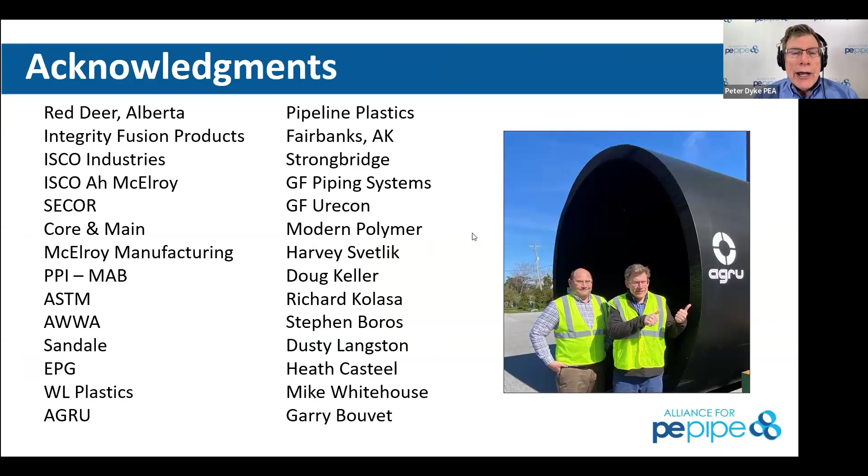Hey Peter, I really appreciate the opportunity to come back on with you guys. Always enjoy the webinars and every chance I get to chat with you guys and share my experience with our story on HDPE and the evolution of why we transitioned a lot of our standards to HDPE. I'm Vice President of Operations for Fairbanks. Fairbanks is about 150 miles south of the Arctic Circle, so we see pretty much winter conditions from November to the end of May. I have 24 years of experience with cold weather utility operations, construction, design, and management. We installed our first HDPE project in 2012, and since then we're up to about 21 miles of water main, 3 miles of sewer force main, and probably 100 miles of services. Again, really appreciate the opportunity to join you.

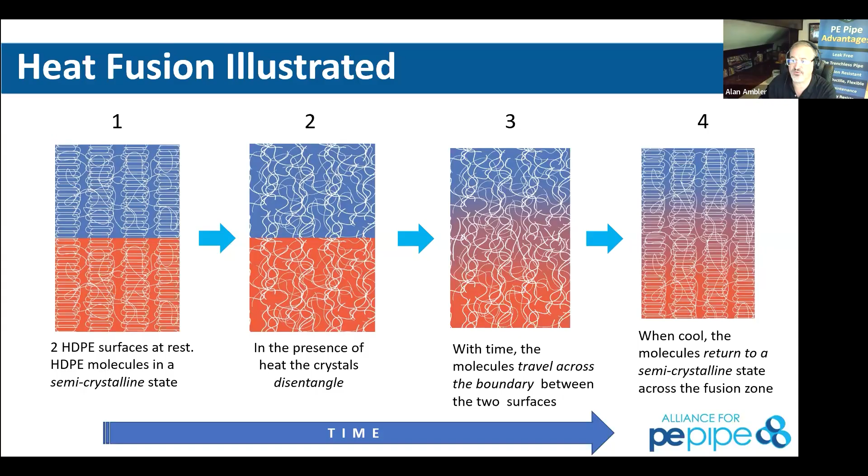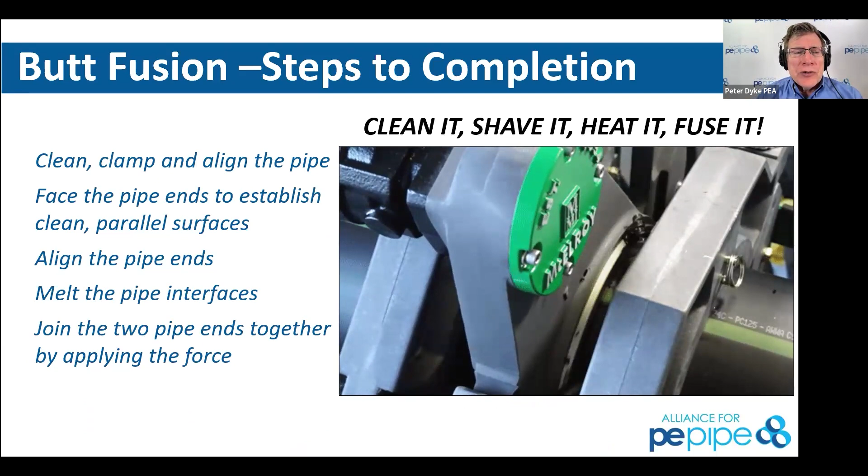Isn't that right, Peter? It is. And what we like to say is clean it, shave it, heat it, fuse it. So this is the shaving process. We use ASTM F2620 primarily as our standard, although some gas companies use different standards. We put it in that McElroy fusion machine. We face or shave, another verb meaning the same thing, and align the pipe ends.

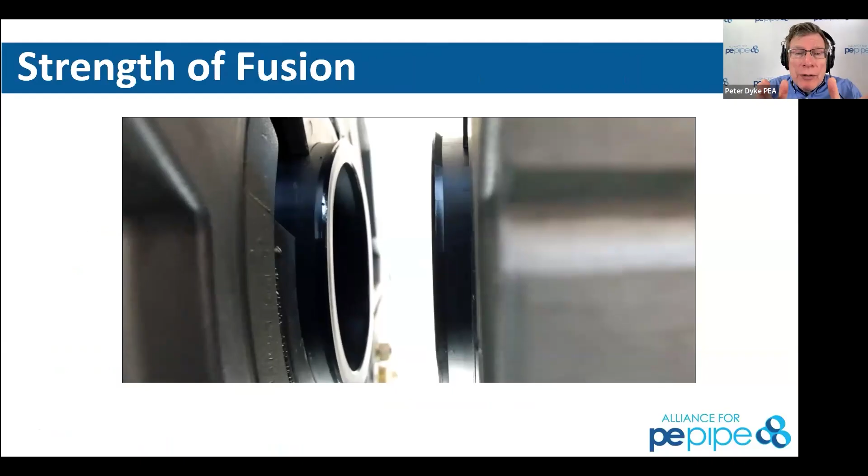After we've shaved it, Alan, then we put it in the heat soak process. We heat up those pipe ends so that those ends can fuse together like you just described. All those little amorphous regions connect with one another, and that joint actually ends up being stronger than the pipe itself.

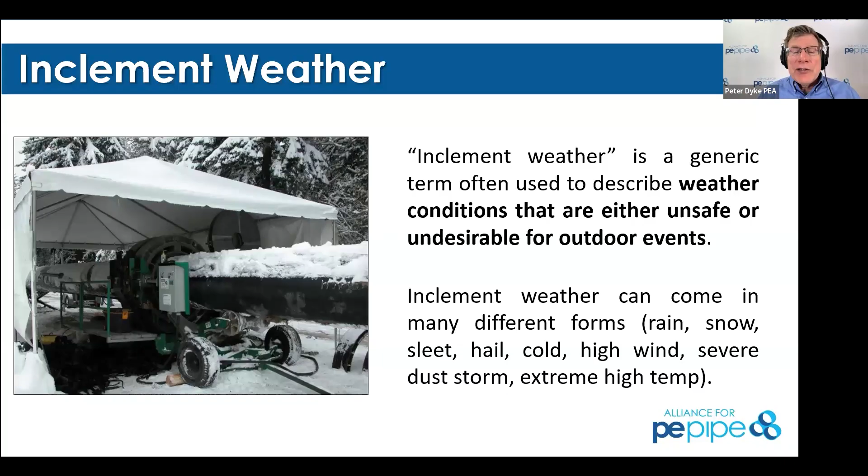Alan and I were in Peru earlier this year. We were doing fusions. It was 95 degrees and very humid. All these things need to be taken into consideration.

Another interesting thing about this pipe is it can be full of water, it can freeze, and guess what? It's not going to crack.

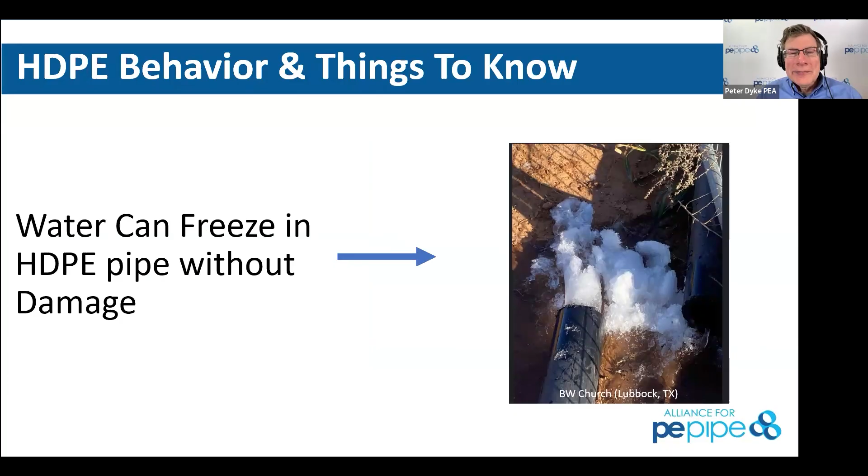And here it is using some of Carl's insulated pipe. Here's water actually coming out of the pipe end that's been insulated without heat trace there. So that's about a 1-inch line and about a 4-inch overwrap.

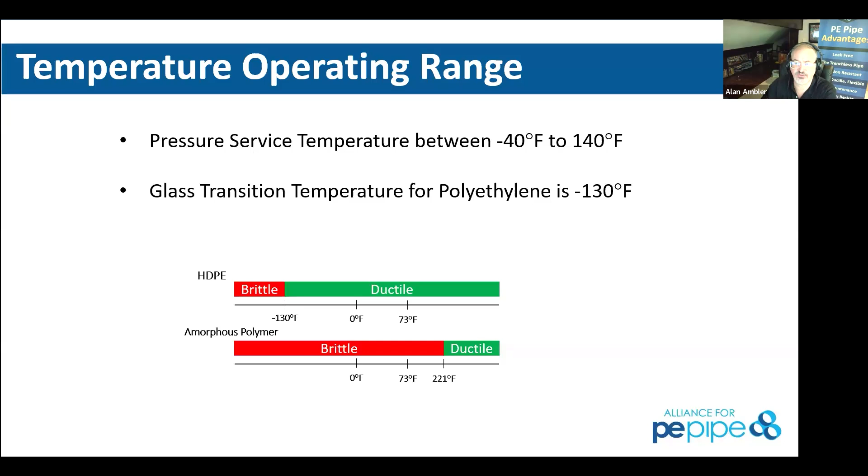So we're looking at the temperature operating range. HDPE happens to be brittle at -130, which is very different than an amorphous polymer, which otherwise could be PVC or products like that, which is brittle at 221 degrees Fahrenheit. So it is very ductile, very rugged and movable, and allows us to work with it within our contractor pull base. Contractors love this material because it is so rugged and durable through this process.

We do need to look at thermal effects and thermal conditions. Basically, HDPE will contract in cold weather or expand in warm weather. We will look at that dynamic change in temperature to give us some idea as to the extent to which that pipe will expand or contract in our area.

One interesting thing to note is that the expansion of the pipe is immaterial of the actual pipe diameter. So if we have a 200-foot pipe that has a 40-degree temperature change, we could see 8 inches of expansion versus carbon steel at 3/5 of an inch.

Now, what that gives us is that the coefficient of thermal expansion is larger for HDPE. That's not the end of the world, because once we translate that through the modulus of elasticity, which is lower for HDPE than it is for carbon steel, the amount of force required to restrain that 8 inches of growth is only 320 pounds versus carbon steel, which could require 4 tons to stop it from moving that 3/5 of an inch.

As we get into bigger pipe, that cross-sectional area gets bigger, and so now the force required to restrain that also gets bigger as well.

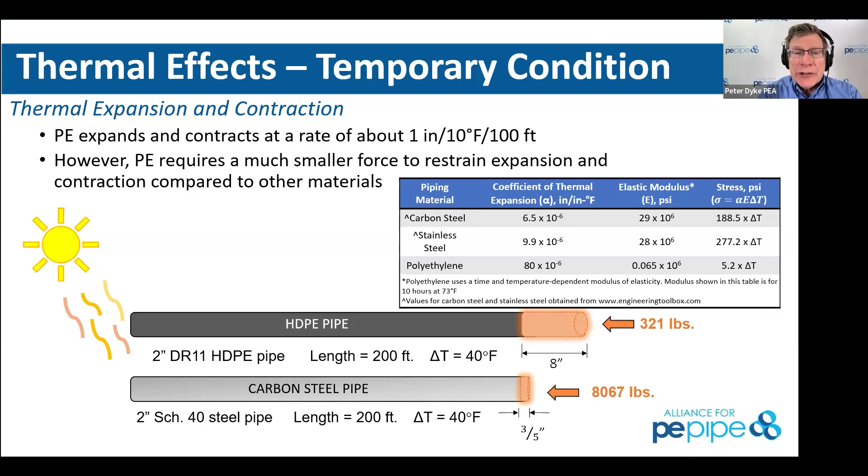I see a lot of people take this issue, which I call a temporary condition, the thermal effects. These issues tend to be during construction. They are important during operation when we're above ground or at grade, but underground these issues are not significant at all. This is one of my favorite slides because it provides the engineer and the owner accountability.

The data logger is an important tool that tracks hydraulic fusion, whether we're talking mechanical in a building and data centers, or a 30-mile pipeline going in ground. This data logger can track what the fusion tech did during the fusion process, and it can be reviewed by an inspector or an owner before that pipeline goes underground.

Also, the side bend tester: you can cut out a coupon from a fusion, so it's a destructive test, and you can sample that coupon to see whether the fusion was done correctly.

Okay, so now you pull that coupon out, and if there was a cut or a tear, it would have been a bad fusion. But in this case, there was no crack, there was no sound. This is a relatively inexpensive way to determine whether or not those fusions have been done correctly. So between the data logger and the side bend tester, you've got it covered. And then just make sure your fusion tech is properly trained.

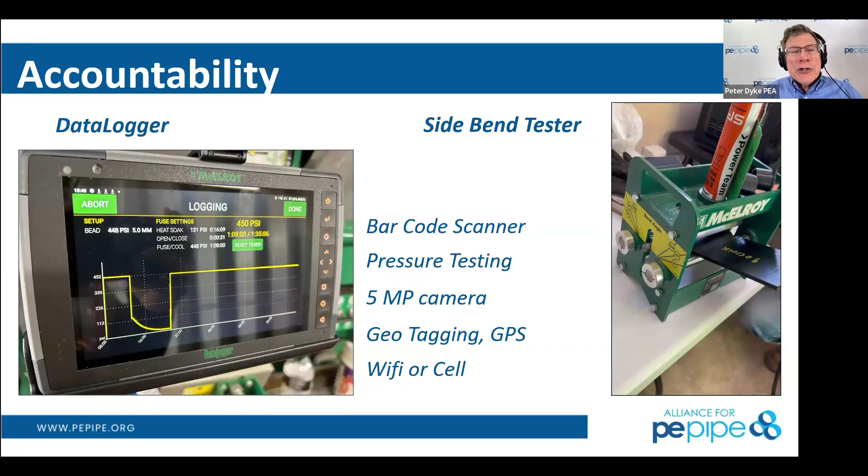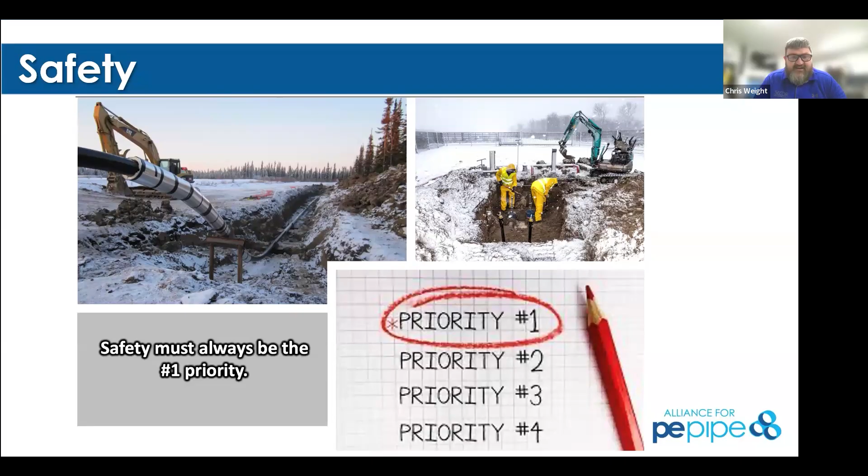All right. So the biggest thing to remember in cold weather operations or warm weather operations is safety. It's the number one priority when you're out there fusing. In the heat, it can get just as bad as it can in the cold. You can always put more clothes on, but you can't strip down out in the field. So remember that, make sure that you're shielding your areas and capping your pipe ends, in the wintertime and in the summertime if the wind's blowing.

You need to maintain your equipment. The chart on here is really helpful for McElroy. You can get this off their website.

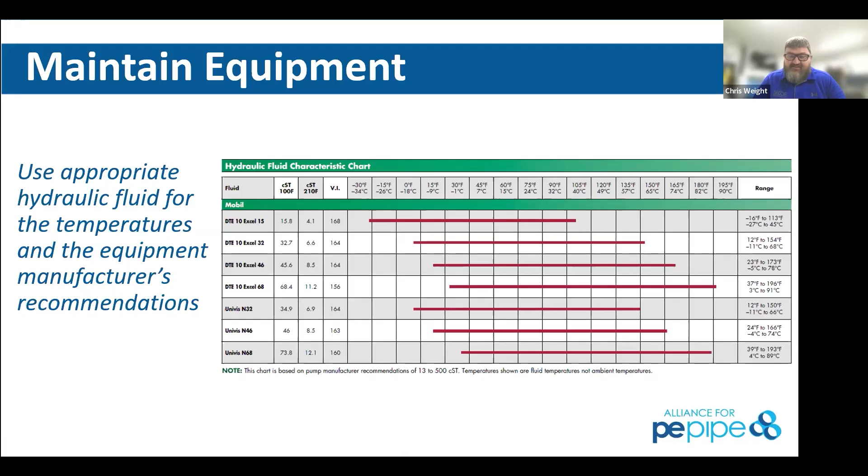It tells you the viscosity of oil and what temperature range you're operating in. Make sure you're running the correct oils in your machine on the hydraulic side, because it will affect fusion pressures and movement of the cylinders, keeping everything running smoothly rather than chattering and moving too slow. If the oil gets too thick, the jaws have a tendency to move really slow until that oil gets up to temperature.

There's a lot of tools out there. On the left-hand side, you'll see a poly porter from McElroy. That's good for 8-inch and down. They can also be used as dollies with a pair of them to move the pipe around on location if you're just doing a couple of sticks where you don't have to have as big of a piece of equipment out there. And on the right side, you're going to see pipe rollers.

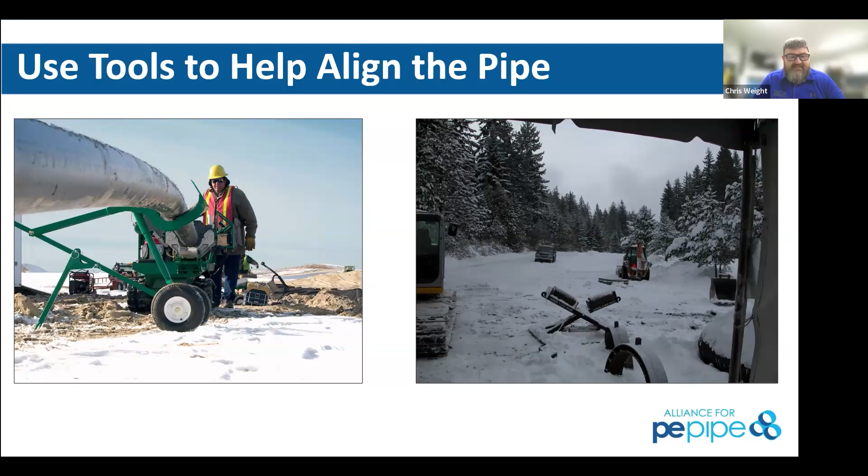There's a lot of different combinations of pipe rollers out there. I recommend using those, especially coming off your fusion machine. You get on the snow and ice, it's not so bad once you got your fusion cooled for the rough handling time.

Then you can start dragging it on the snow and ice and it will not damage that pipe. Check your generators. Elevation is something that we run into up here that a lot of people don't. When you get down in the southern states and get close to sea level, that's where those generators are rated at the highest. Make sure that you got consistent power output. Check the amperage coming out. McElroy does put out on every one of their machines what the voltage requirements are for the heater and the fusion machine if it's an electric fusion machine, and make sure you have plenty of voltage there to run that machine, but also maintain your generators.

Yes, Peter? Chris, we get a lot of questions about welding generators being inconsistent power. For a lot of us out here don't really understand electricity. Can you explain why those welding generators aren't okay to run McElroy fusion equipment?

That's the key to it, is making sure you have the right generator, but look at your elevation, because you need to make sure that as you go up in elevation, you're also going up in wattage, because you lose output out of that generator at higher elevations.

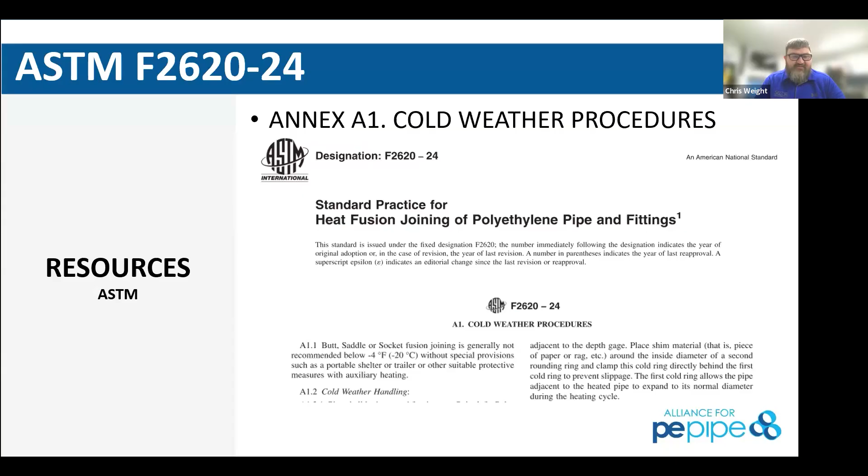You can go into ASTM F2620-24, and Annex A1 does have some cold weather procedures for every type of fusion, whether it's butt fusion, saddle fusion, or socket fusion. I recommend, if you are in cold weather areas, to get a copy of ASTM F2620-24 and read through those cold weather procedures. MAB puts out a lot of good guidelines for fusing in cold weather. This is a free source.

Yeah, we get a lot of our content for today, Chris, from ASTM F2620. The cold weather appendix was first published in 2020, and it was republished in 2024. And then also, as you say, this MAB guideline is fantastic. Thanks for bringing it up.

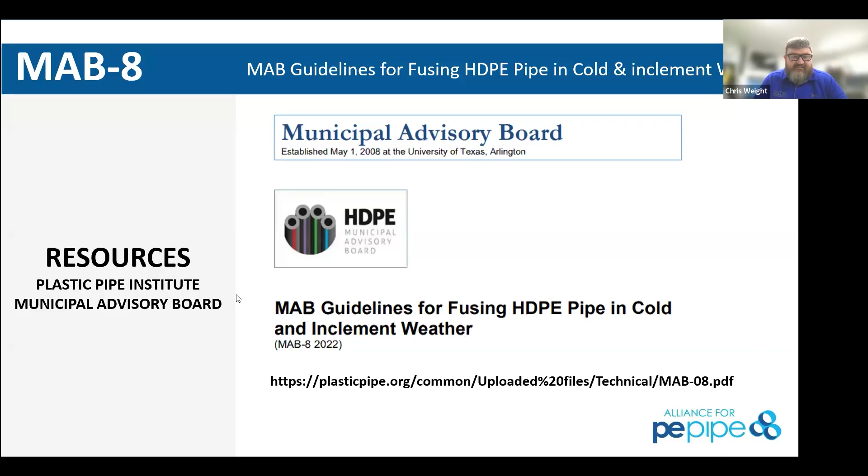No problem. It is a free source, so you can get on the Municipal Advisory Board's website, or the website right at the bottom, plasticpipe.org. Go there, MAB08, and download a copy of that. It will help you tremendously in the field.

Cold weather fusion, according to MAB08, the first thing you're going to do is remove snow, ice, and melted ice from the pipe. In that situation, you don't have to do the entire piece of pipe, just anything that's going to come into contact with the fusion machine, and I would recommend getting a couple feet outside of the fusion machine. This goes for a question I saw pop up earlier about dirt that's built up on the pipe. Same situation here. You need to clean that dirt off. Anything that's going to be close to the fusion zone, you need to clean off.

That way it's not plugging up the serrations and the inserts of your fusion machine. You get gripping force, pipe's not going to slip. Make sure that all that's clean inside and out. There's nothing worse than getting ready to put the heater in. You bring it together and water comes running down the pipe because there was a little bit of ice in there, and the heat started to warm it up just enough where now you've got water running down the pipe. So you have to stop and clean that out.

HDPE does have reduced impact resistance in cold weather. Don't drop your pipe. You need to handle the pipe just like anything else, with care. I've seen people just take a loader and shove a load of pipe off the truck, and that's really not a good situation.

So provide adequate enclosures for your pipe and your fusion tech. That's going to be one of the keys in the weather. I was just on a job the other day, the guys were out there and it was like 5 degrees and the wind was blowing 30 miles an hour, and they didn't even have a tent set up over the fusion machine. I said, guys, you got to stop, you got to get a tent over this and block the wind.

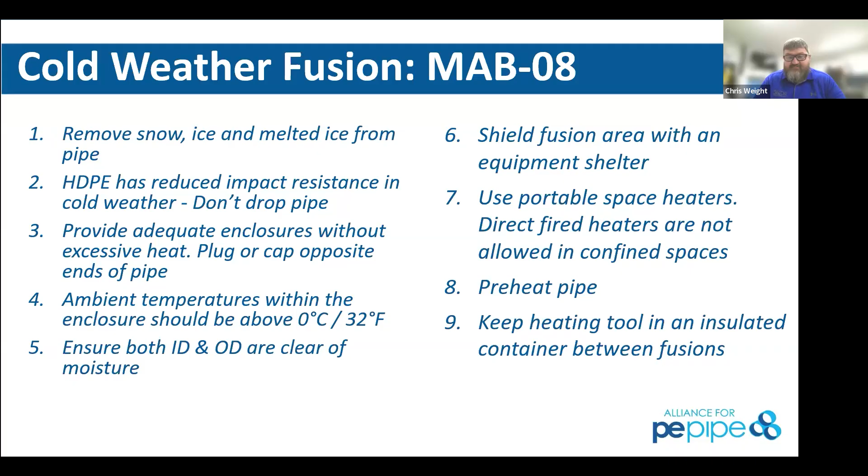And they were getting inconsistent fuses, and that will cause that. When the enclosure should be anywhere around 32 degrees, you should start enclosing it. And then space heaters will help. Preheat your pipe will help, and keep the heating tool in an insulated container between the fusions.

Patience is the key. This is the number one golden rule. Your cool down times are going to be your cool down times. Your heat up times in the winter time are going to be longer. If you're meeting a bead in the recommended time frame of ASTM F2620, which is 4.5 minutes per inch of wall thickness, you're probably heating under some sort of pressure. You have to be patient. Make sure you have no pressure and the beads are developing naturally up against the heater instead of with pressure.

Golden rule number 2 is change the conditions, not the procedure. ASTM F2620 and MAB08 were written for a reason. Make sure that you're following that, even with their cold weather procedures. You need to change what you're doing based on the conditions rather than changing the procedure. The procedure is set in stone on how you fuse pipe.

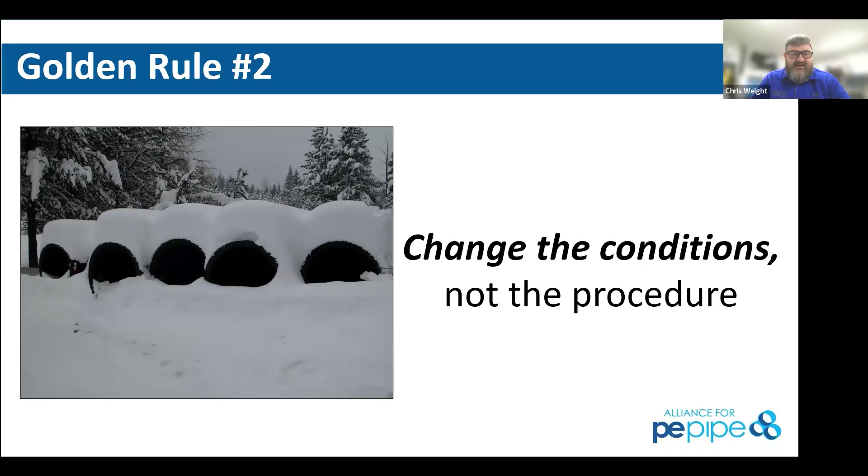Again, back to removing the snow and ice, the picture you can see there, anything that's going to come into contact with that fusion machine, and then about 2 foot outside of that, that snow and ice is going to need to be cleaned off, scraped off with a plastic ice scraper. I don't recommend doing anything metallic on that pipe because you can scar it up that way. But remove the snow and ice inside and outside as far as you can reach on the inside without putting yourself in harm's way and crawling inside a piece of pipe. Obviously, the bigger pipe, you can do that. The smaller pipe, you cannot. But make sure you're blocking anything from running down, especially if you're fusing on a hillside.

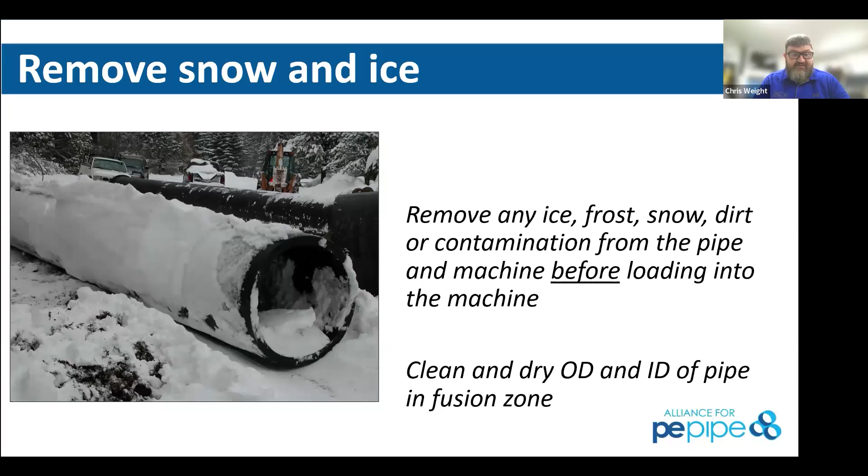Examine your pipe. The car there, they had a bad day. I see a lot of people hit pipe, and when you get out in the field, that gouge in the middle, if it's not over 10%, go ahead, Peter.

Yeah, Richard Kolasa has got a great story about a car hitting a pipe too, and it was minus 30 degrees, and the damage, Chris, was at the bottom of the pipe. In this case, the damage was obvious, you know, we've got a tire in a car.

Image number 2 is kind of interesting, Chris. You look at that and say, 'Oh, the pipe's damaged,' but is it really? No, and that's it. You can use a tire depth gauge. If it's not over 10% of the wall thickness, it's not considered derated, it's not considered damaged. You can drag it on the asphalt as long as you're not putting gouges in it that are over 10% of the wall thickness of the pipe.

Yeah, that's kind of interesting. Richard Kolasa, you're up. Just a quick comment on that: if you do see those impacts, the one thing we did not notice on that cold weather impact of the car, it did crack, but of course cracks in polyethylene don't propagate really long, they actually stop. So the crack was only about 1.5 feet long, but we ended up pulling that thing in through the drill because we did not see that crack, because it kind of folds in on itself tight. Just make sure you inspect your pipe before you pull it underground, because it did leak.

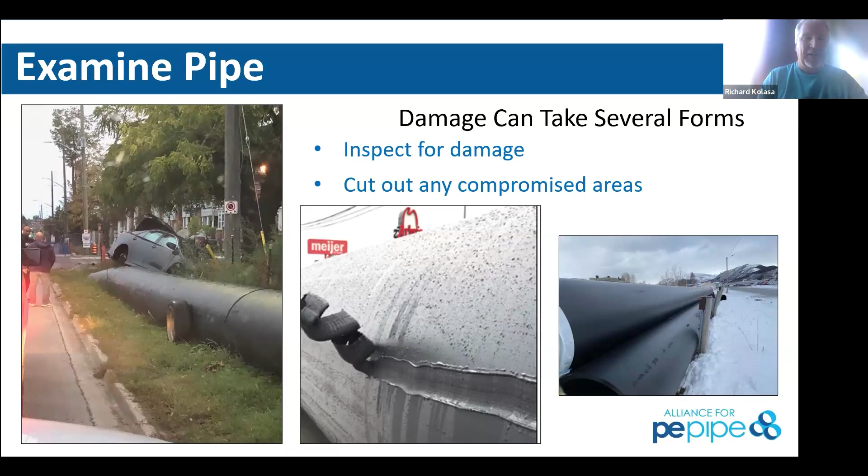But it was a bit of a bugger because we had two weeks to replace that line. So Dan Landy and I were out on this job site in Arizona, and it was, gosh, Dan, I don't know, 15 degrees. There was some JM Eagle pipe that had been damaged. We're like, wow, what happened there? Well, they dropped it off of a front end loader. It was 36-inch DR17 and it cracked. So that does happen on occasion, doesn't it, Alan?

It certainly can. We had some questions about Arizona in particular for hot weather as well. Some of the things you'd look for in hot weather is to understand the expansion through heating up of that surface, especially in temporary construction conditions when we're elongating the pipe and then putting it down into the ground and allowing it to calibrate with the soil temperature. So, of course, I'm derailing and talking about warm weather, but there are some places in Arizona with the cold weather we're talking about as well.

We don't typically do a warm weather webinar, but there is some nuance through pressure testing in the morning as opposed to the afternoon, because there's some expansion diametrically of that surface once we start to absorb the heat, which the carbon black does on the outside of the surface of the pipe.

So keep going, Chris. You're doing great. Thank you. Don't drop your pipe. We've talked about this. As Peter just said, they dropped that stuff in Arizona and it broke.

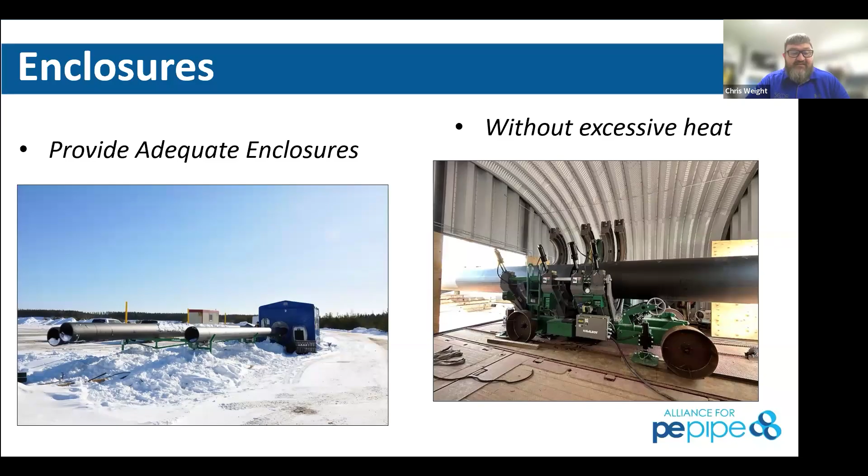It can happen. Provide adequate enclosures. You don't want excessive heat in there. You want to get that pipe up. I try to get all my pipe up when I'm preheating in enclosures to around 50 degrees at a minimum. That can go either direction there. You don't have to be exactly at 50 degrees, but that's where I feel most comfortable making my fusions and preheating that pipe end.

Protect your fusion area. You can see the tent down there. They've got the end of the machine sticking out so it can still pull fresh air in. You want to be sure everything is going that way. You don't want to fill your enclosure with exhaust or anything like that. So be careful when you're just throwing a tent over a fusion machine, because these diesel powered machines will smoke you out eventually.

On the right, you see the McElroy Quick Camp. I have not had the pleasure of working with one of these yet. I don't plan on going to Canada anytime soon to really work with one, but it's a great machine. It's a Connex, folds out. It's got a fusion machine in there. You drag the pipe on through, make your fusions. Plug the ends of the pipe.

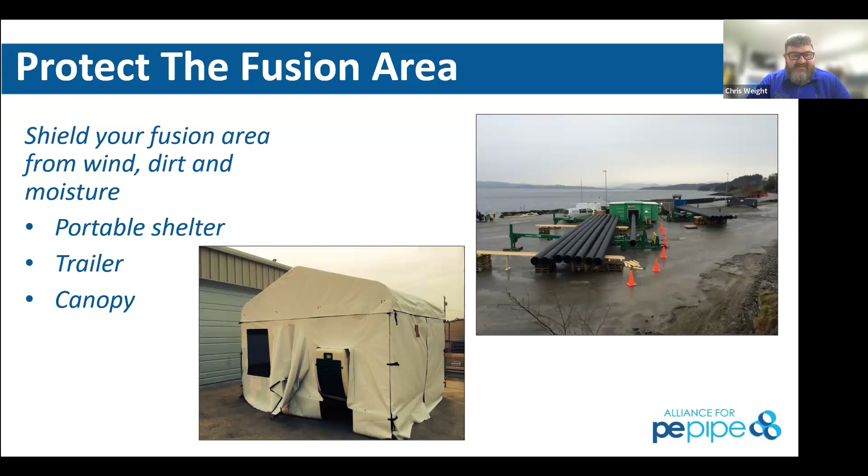Make sure your equipment's free of ice and snow. That goes to scraping the ice and snow off of there. Go ahead, Peter. Hey, yeah, go back one slide, would you, Alan?

I actually was pressure testing on a line that was not in the municipal water industry, and as I was blowing the pressure test down, I blew an animal out of the valve. It was quite stinky when that happened, because it had obviously been in there for a while. So capping the pipe ends and bagging them off keeps the animals out, because that pipe, even in cold weather, is still going to be warmer than being out in the snow and ice.

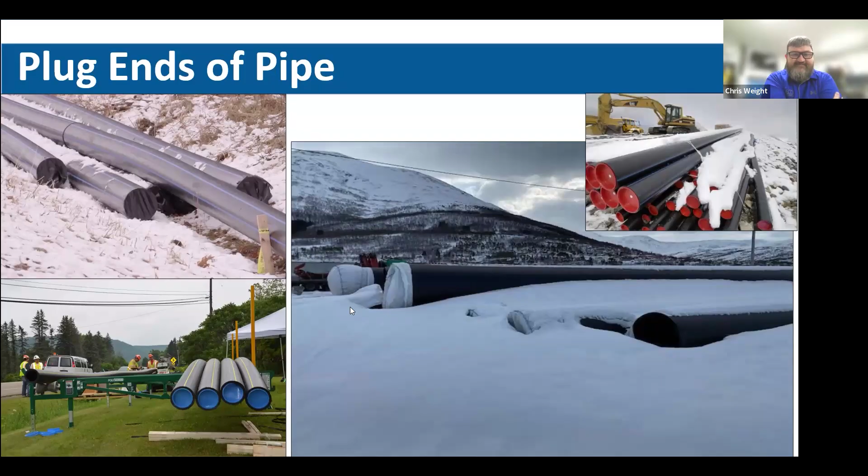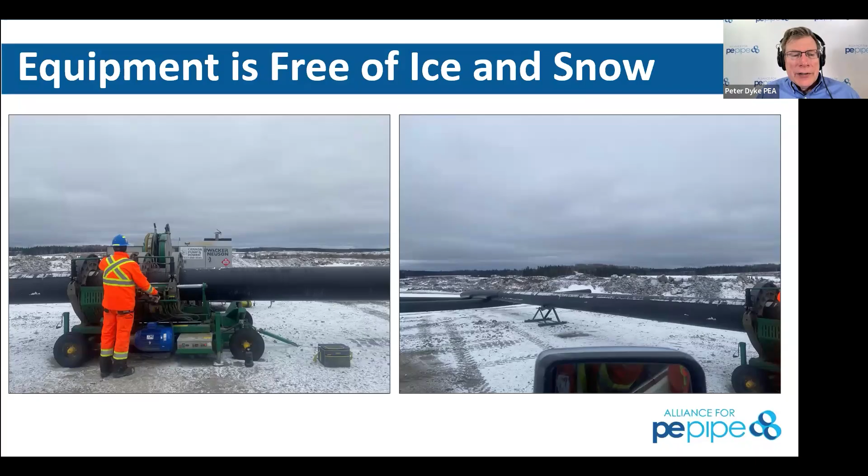I like this slide a lot too, because on the left we have the guy doing fusion and there's no snow on the pipe at all. And there's a pipe stand over there that's fairly clean of snow and ice. So these are people taking the time and care to do it correctly. And then the one on the right, Chris, I wanted to mention this one.

This guy gets an F. I mean, the guy's got a tent, but he's got snow right up to the jaw. And as Chris, you've described to me before, with that heater going, that snow could melt and you could end up with water in the fusion zone.

It's not a matter of if that snow can melt, it's when that snow is going to melt. That heater's running 400 to 450 degrees. It doesn't take long for that heat to permeate out through the pipe. Hell, just the sun shining on it will melt the snow and ice a lot of times, especially if you get in a tent like that. So the F is really big there, it might even be an F minus. They should have cleaned that all the way outside of the fusion machine.

It looks to me like that's a 1600, so they're fusing probably 54-inch pipe there, and there's a lot of snow and ice, so there's a lot of water there. If you were to melt that down, there's easily 3 or 4 gallons of water there probably.

So Chris called it a 1600. McElroy, with a lot of their larger machines particularly, their primary name is in metric, not imperial, so 1600 millimeters is a 1.6 meter. So it's 1.6 times 39 to get the diameter in inches. You just kind of have to get conversant with that, particularly with the larger machines.

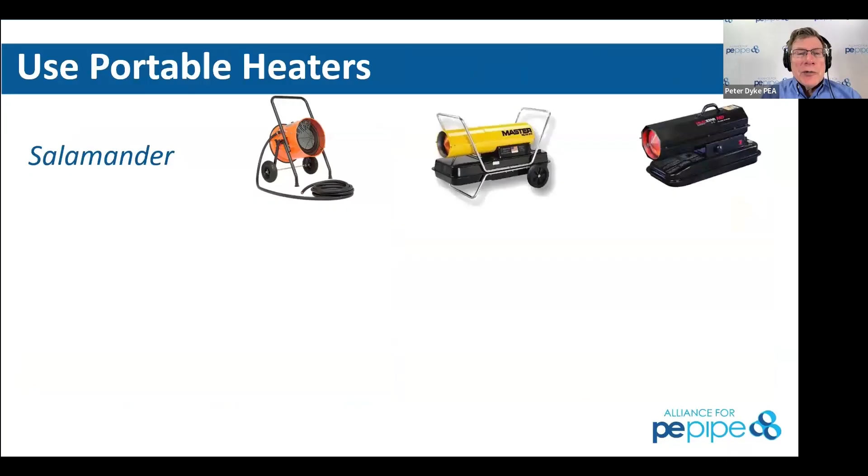Okay, Chris, tell us about some heaters. Portable heaters, you can use anything that's not going to put direct flame to the pipe. Salamander heaters at the top, we've used those. Obviously you don't want to get them so close to the pipe that they start melting the plastic itself. Infrared heaters work great. We use a lot of heating blankets, especially on the electrofusion side of things, to preheat the pipe before we put our electrofusion coupler on. Any of those are good options. Anything besides an open flame touching the pipe is a great option.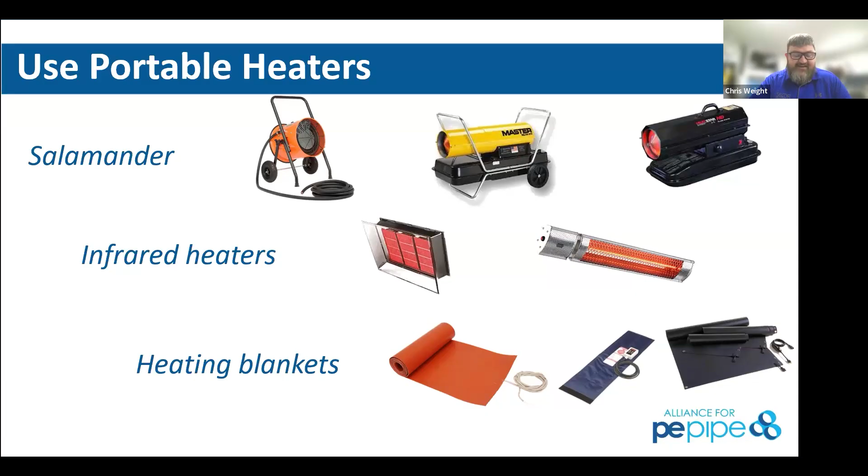I saw a question pop up earlier about somebody wanting to know if they could use a torch to melt the ice and snow out of the inside of the pipe. I don't recommend anything with an open flame getting that close to the plastic.

Preheat your pipe ends. This is very imperative that you do that when you're pulling your pipe in and that pipe's sitting out there. In the new data logger app, it actually asks you for a pipe temperature, which is kind of nice, so it makes it real easy to pull that pipe up within about a half to a quarter of an inch of your heater. You don't want to get it over 120 degrees, but just let it sit there with that heater in between, and it will preheat those pipe ends up.

Just to reinforce what you said, Chris, ASTM F2620-24 in the appendix tells us that preheating is preheating, but it's not preheat soaking. So you're not actually touching the pipe end. You're within a quarter to a half inch at most. Is that correct? Yes, sir. Okay, so just want to make that very clear.

Use tents, tarps, and warm air. As you can see right there, they've got a flameless heater ducting it down through the pipe. If you don't set your heater properly, you can get that pipe quite hot, so you got to pay attention to what you're doing with it. But that's a great setup to be able to preheat two sticks of pipe at a time. They've got it mounted on the back of the truck.

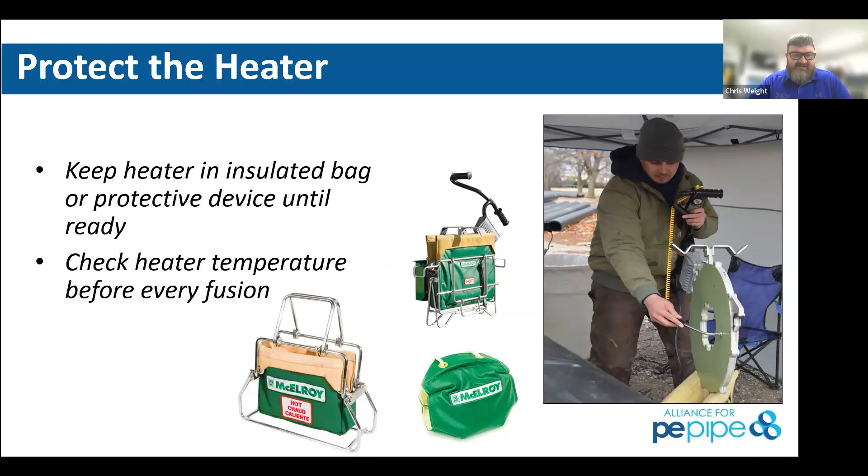They just move it down when they're getting ready to make the next fuse and start preheating the next two sticks. So that's a great situation. Protect your heater, make sure it's always in an insulated heater bag. There's a lot of different options out there that McElroy has. Every heater comes with a heater bag, so make sure your insulated bag part is not shredded, because as they start shredding, putting the heater in and out, they will start deteriorating, and you'll lose heat out of them that way.

So just in a quick summary here: don't drop your pipe, provide your adequate enclosures, use your tents, tarps, and warm air if possible, protect the fusion zone - that's one of the biggest ones right there, making sure there's no snow and ice in there. Portable space heaters are really handy for your operator, preheating, and keep the heating tool in the insulated container.

You got to keep that container clean too, don't you? Yes, sir. They've done a really good job now with putting webbing on the bottom, so the dirt actually falls out instead of having a sealed bottom on them, which is kind of nice. Oh, I didn't know that.

That's news. We just had a question come in, and I think it's a good time to reinforce it. It's important that these guys are trained, the fusion techs. You're an inspector - how do you know that the guy's been trained and he's not just feeding you a line on why he's going a lot faster today than he was yesterday? Well, that's the biggest situation. You got to be sure you're getting trained by an adequate trainer.

There's various distributors out there. McElroy University is great at their fusion training. They need to have a viable fusion certification from a viable instructor. With McElroy, I'm a McElroy certified instructor also, so I carry a card with me that I can just tap on their phone, and it pulls up a website from McElroy and shows that inspector my credentials that I'm a trainer. So make sure that your guys are getting trained by a viable trainer and not just a tailgate training.

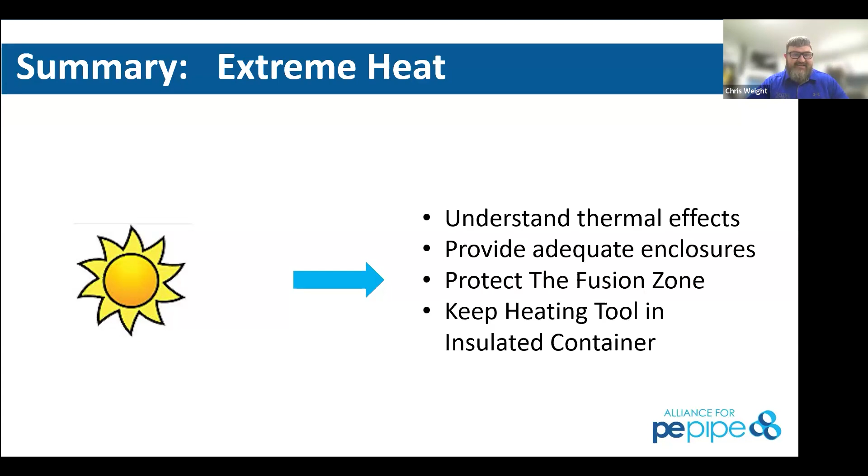Again, protecting the fusion zone, putting your enclosure up - it could just be one of the little 10 by 10 tents from Walmart over it, but it's keeping the sun off the pipe and helping lower those surface temperatures. But one thing you really got to pay attention to is just because you took a pipe temperature at the top and it's 110 degrees, the bottom is going to be cooler than that. So you could see some inconsistent heating. I've seen contractors actually roll the pipe over and let it sit for a little bit until the temperature equalizes. Obviously, bigger sticks is hard to do that.

Windy, same situation - protect. That's what we got to do. We got to protect the ends, we got to protect from the wind.

I don't care if it's hot wind or cold wind, we've got to protect the ends to keep the snow and dirt from blowing up into the pipe, onto the heater, and into the fusion zone.

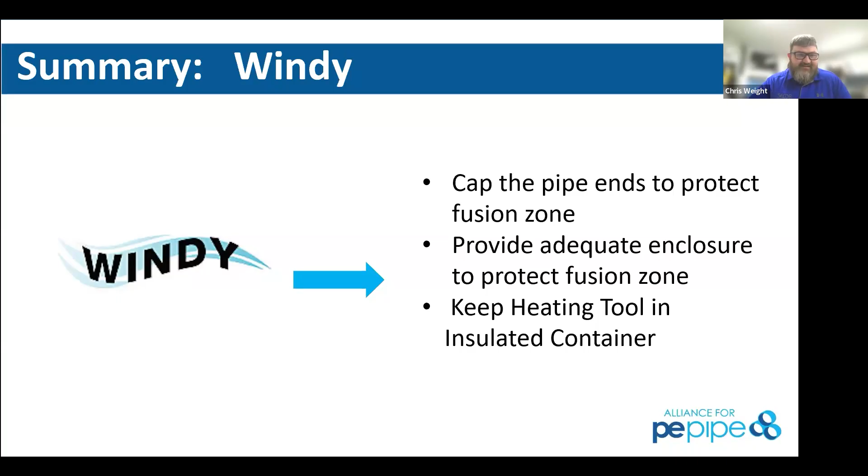I actually have. A good day with no wind in Wyoming is about 30 miles an hour, it seems like. So protecting it is key. You see a lot of guys out there throw a bag over the end—you don't even have to tape it on. If you use a burlap sack style or synthetic ones, just put it over the end of the pipe to keep the dirt, snow, and ice from blowing up into it.

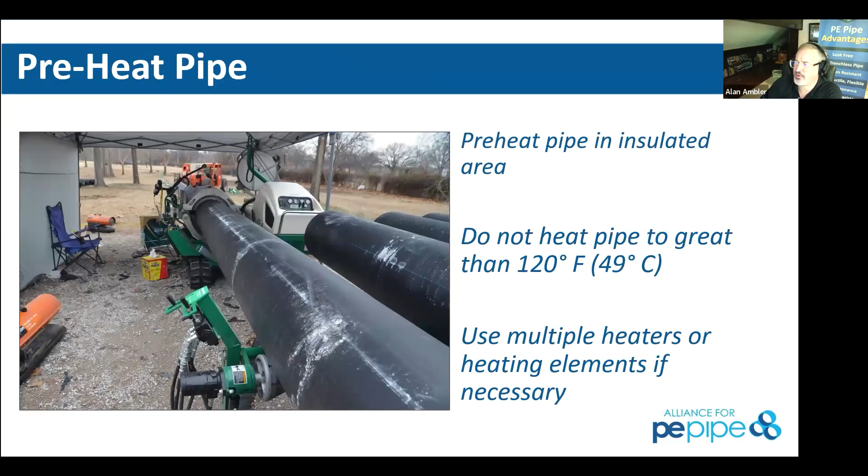Alan, Peter, and Chris, we got a really good question about all these things going on to protect the fusion zone and teach people how to fuse—that it seems to be leading to more cost than installing other products. Sometimes we get to really harp on key things, and sometimes we don't, so I'm going to go right back to this slide. Thank you very much for that question.

The productivity we get by fusing multiple long runs at one time translates directly to major cost savings. When a contractor understands that we can fuse out 500 feet, 1,000 feet, and then dig a ditch that long and dump the pipe right into it, they're going to find massive cost savings.

If we're just going to sit there and move the machine from one joint to the next, you're not going to do this efficiently. It's called a paradigm shift with our contractors—understanding that long linear length and our availability to put a single piece of pipe, maybe 1,000 feet, into the ground is going to give us a huge amount of productivity.

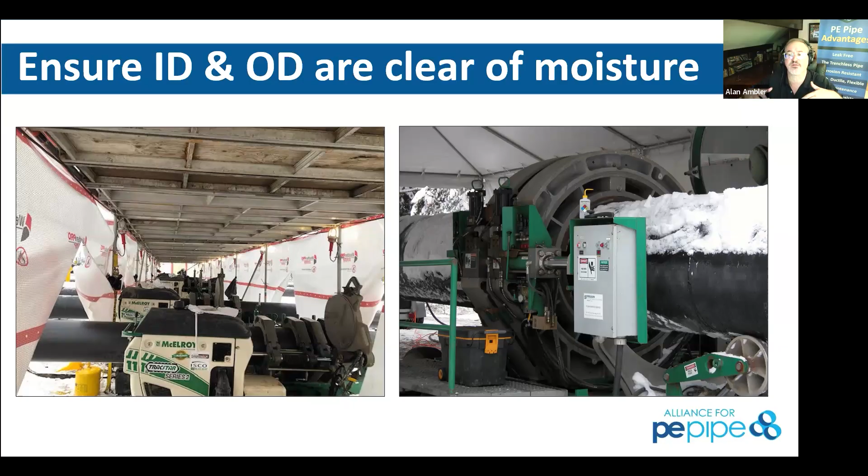That's part of the learning—training that the joints are stronger than the actual pipe itself and fully restrained. Then we move to this huge amount of productivity to greatly further minimize cost as we go through it. So thank you very much for affording us the luxury of answering that question.

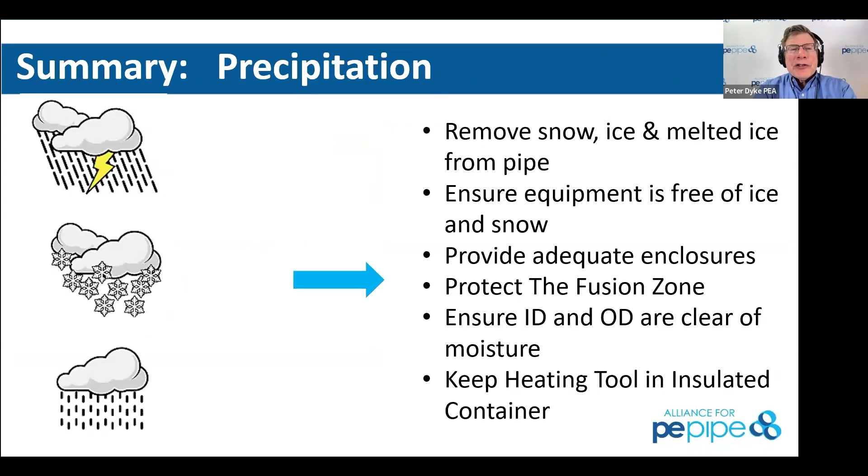Peter, I don't know if you want to comment more here, but we're ready to move on. Yeah Alan, one reason we talk about polyethylene the way we do is, particularly post-COVID—pre-COVID, the off-the-shelf cost of polyethylene was more expensive than PVC. For whatever reason, PVC has been more expensive ever since COVID.

But in the 15 years I've been doing this, Alan, we've seen that polyethylene is consistently the lowest installed cost, whether pre-COVID or not, particularly with horizontal directional drilling or pipe bursting. In many cases, our open cut costs up to 48 inches are less expensive. Above 48 inches we tend to be just as expensive as every other material because we're all open cut at that point.

So Tariq, why don't you come on—your first question: is polyethylene more or less expensive than legacy materials? Less expensive. Why?

Well, for one, cost—my presentation is going to cover a lot of it—but shipping, like for Alaska and Fairbanks here, is extremely expensive. On one project we had 36,000 feet of pipe going in the ground, and it showed up in our staging laydown area on 2 trucks. Any other material would come in rail cars, super expensive. It's efficient, it's affordable, and it affords you the ability to directional drill.

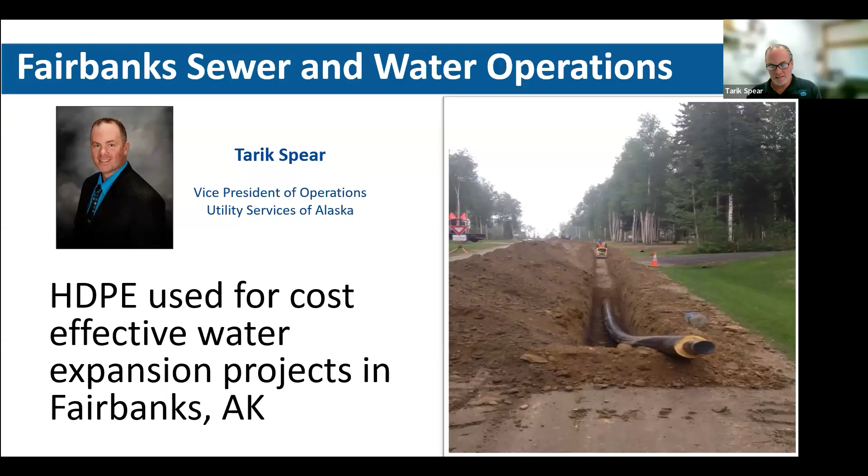Fairbanks, Alaska. Everybody's experiencing a lot of cold across the Midwest, pretty much from Texas to the Carolinas, but we experience that every winter. This winter has been exceptionally cold for us. I think we hit a record - we were below zero for 32 days, the longest duration of that temperature in 108 years. Fairbanks is beautiful in the summer, but can be extremely harsh in the winter.

Finding materials that are affordable, efficient, reduce O&M costs, and improve the thermal heat retention of water that we're already paying hundreds of thousands of dollars to heat to keep our outer loops warm reduces energy costs, improves C factor, and makes it cheaper and less costly for our ratepayers. Our electrical costs here in Fairbanks might approach 30 cents per kilowatt.

Fairbanks Sewer and Water: we have a 5 MGD water treatment plant, 8 MGD wastewater treatment plant, collections and distribution with about 250 miles of distribution main. We have about 21 miles of HDPE, and our standard for any expansion project is now HDPE. Roughly 10,000 metered customers, and the temperatures do get cold.

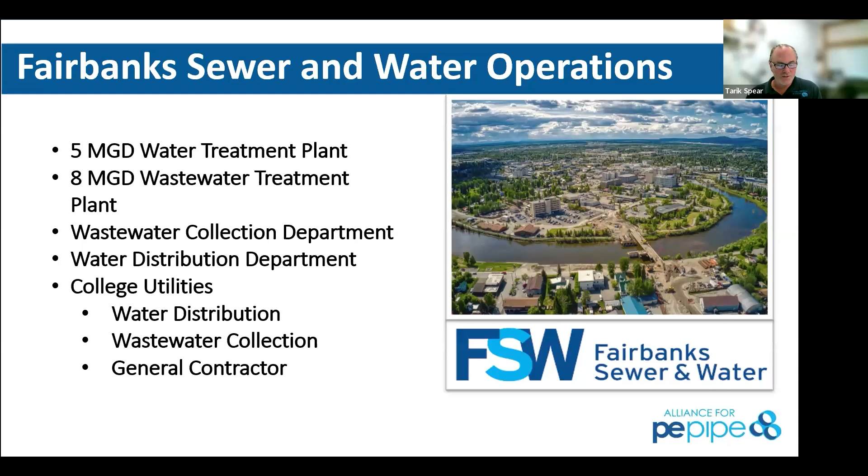This is our headquarters, Utility Services of Alaska, with Golden Heart College Utilities, and the sign reading 41 below, and off to the right you see minus 50 below.

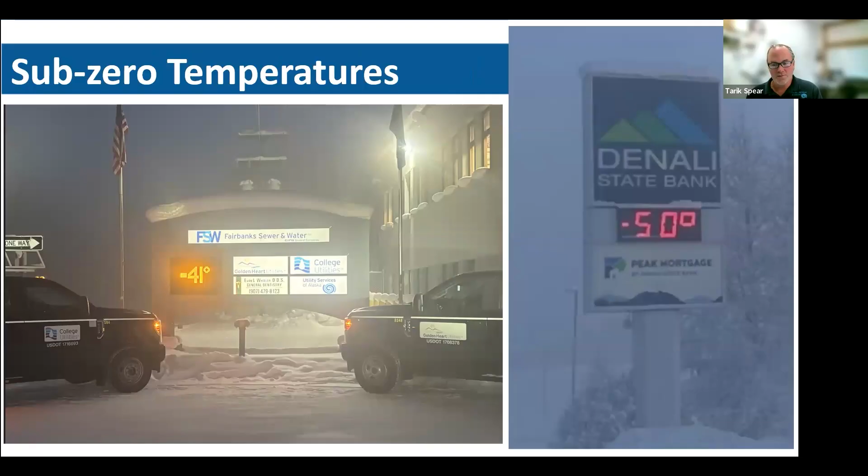We track freezing days every winter, and we can track the ground freeze depth in the fields and in the roads. This is an example of road depth - it's kind of shaded, but this was January 15th. Today's road depth was 8 feet, and you can see where the average is. By end of April, our pipes and a lot of our infrastructure are sitting in 12 feet of frozen ground.

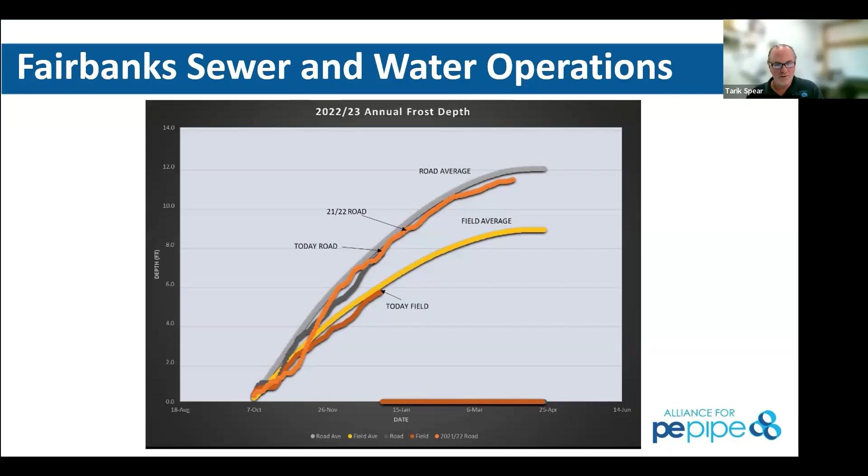In addition to the seasonal freeze, we have a lot of permafrost. Fairbanks is Arctic, 150 miles south of the Arctic Circle, with very corrosive soils - a big plus for HDPE. Permafrost raises havoc on all of our infrastructure through these areas. As soon as you strip the surface and excavate down 4.5 to 5 feet and put a pipeline in, I don't care what you backfill with, that frozen ice is going to start melting. This picture is an example of that.

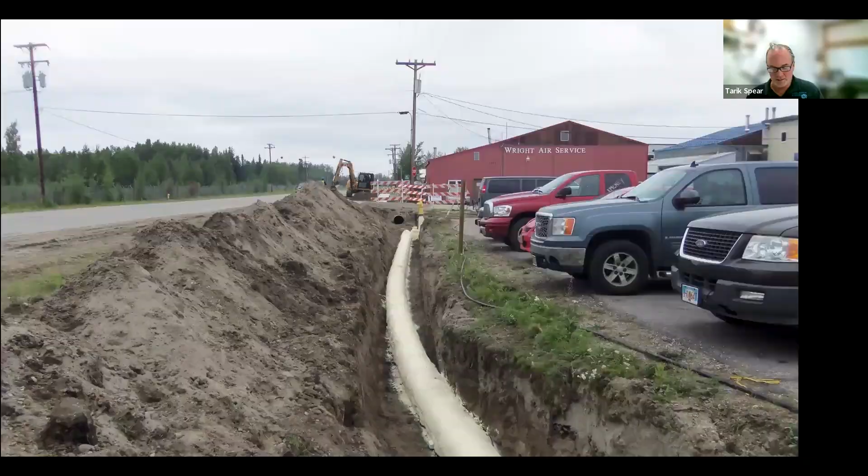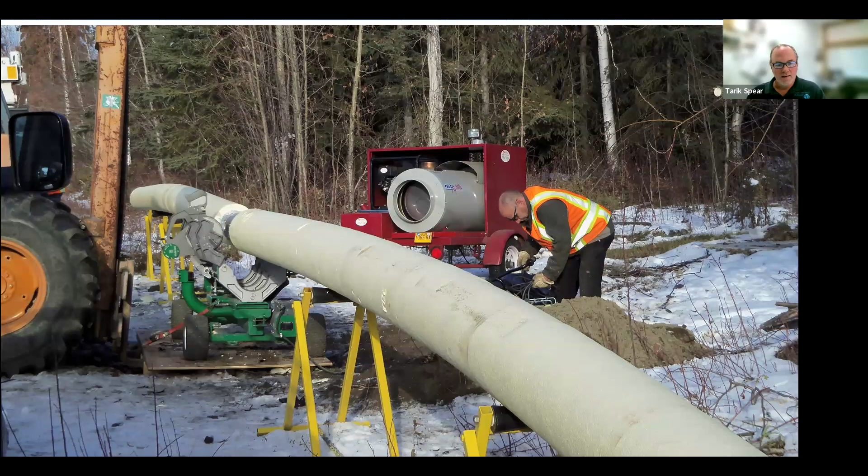Some of the techniques we use for insulating - these next slides will show you what we have. This was an 8,500 foot long slip lining project with 14-inch HDPE SDR11 out by the airport. We had just come out of one of our slip line sleeves and aligned our pipe, installed an isolation valve and a fire hydrant, then ducked back in. There's a local polyurethane contractor here who will come and spray that pipe for us right in the ditch - this is an 8-inch HDPE SDR17. That same contractor built a 40-foot lathe and takes the 40-foot lengths of HDPE and spins it on that lathe as they spray it, putting a nice 2-inch uniform polyurethane spray over the HDPE before it's installed.

I just want to give Chris a shout out - that was an amazing presentation, Chris.

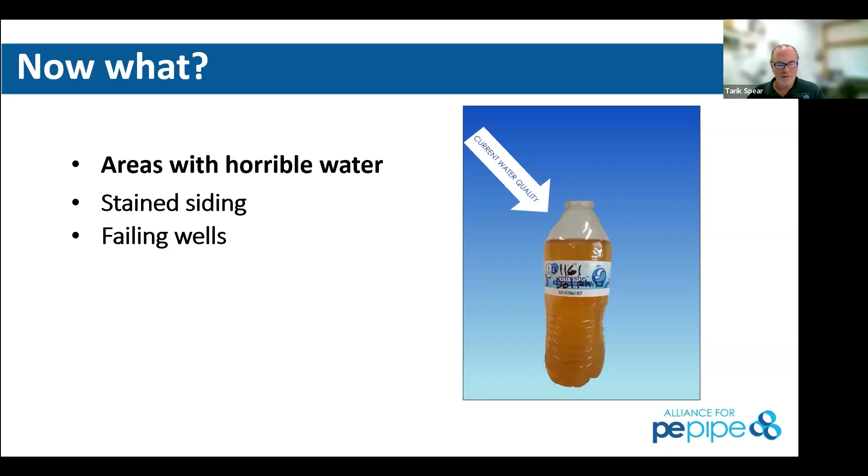Lot of iron, manganese, arsenic, nitrates in areas. So for us, getting potable water to our area is kind of a priority for our utility. I mean, this is what comes out of someone's well.

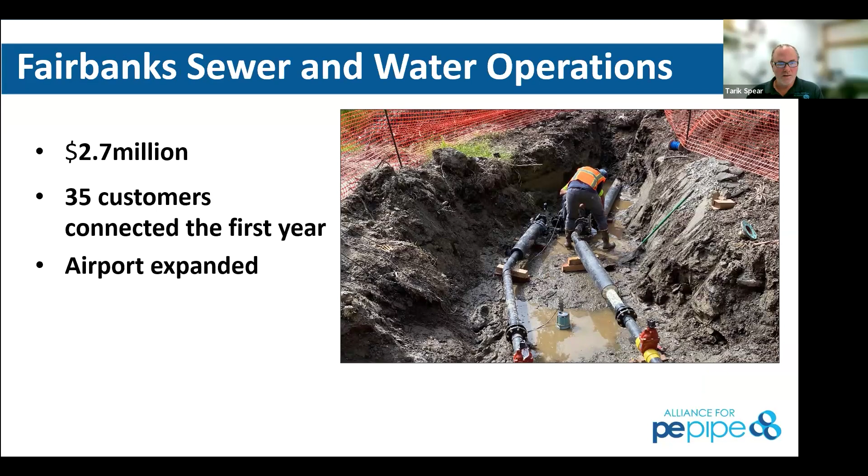This one just kind of ties in, goes into one of our projects and the benefits, cost savings. This project served 35 customers its first year. I think we have well over 100 connected since it was installed in 2013.

As our projects and experience with HDPE evolved, we became better at thermal modeling our heat loss. It's kind of like a battle of BTUs. You have 40-degree water inside your pipeline, and you have frozen ground at 28-degree temperatures on the outside of it.

We discovered that if we're building a system that's 40,000 feet, and that molecule of water takes 9 hours to get from point A to point B where it returns back to a transmission main, we can save hundreds of thousands of dollars on additional insulating by getting spools. We saved, I think, $600,000 in insulating costs and an additional $400,000 just in pipe fusing by going with spools on this project.

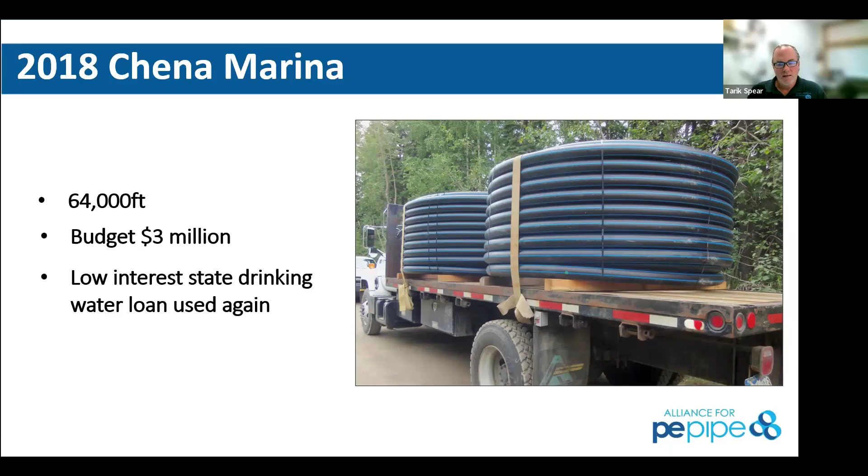This was a repurposed U-liner trailer. We used to do pipelining, but we were able to mount the 4 and 6 inch spools onto this pipe trailer and then pull it through a McElroy pipe tamer.

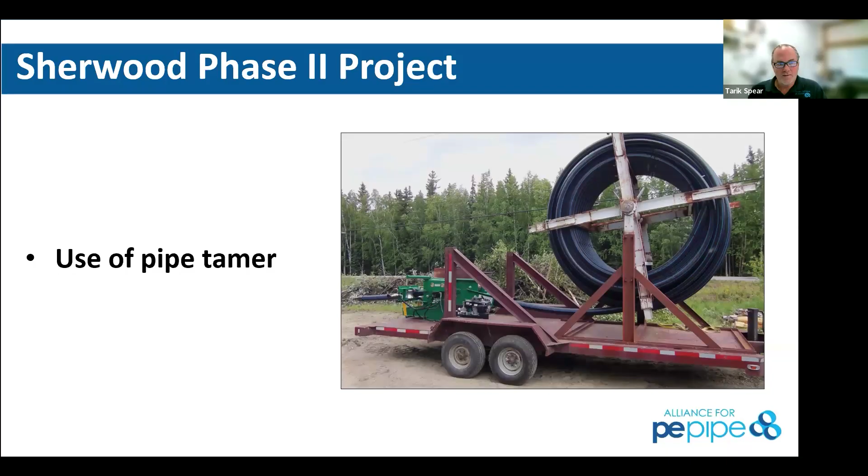This totally changed things. I mean, you want to talk about cost savings — we were averaging 1,000 feet per day on this project, total project length. I think we directional drilled over 7,000 feet, had 2 river crossings, and averaged 1,000 feet per day. It was a really successful project.

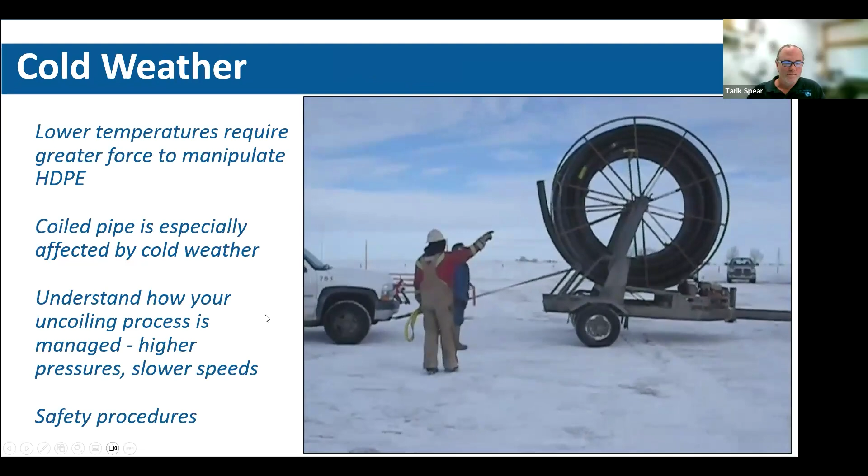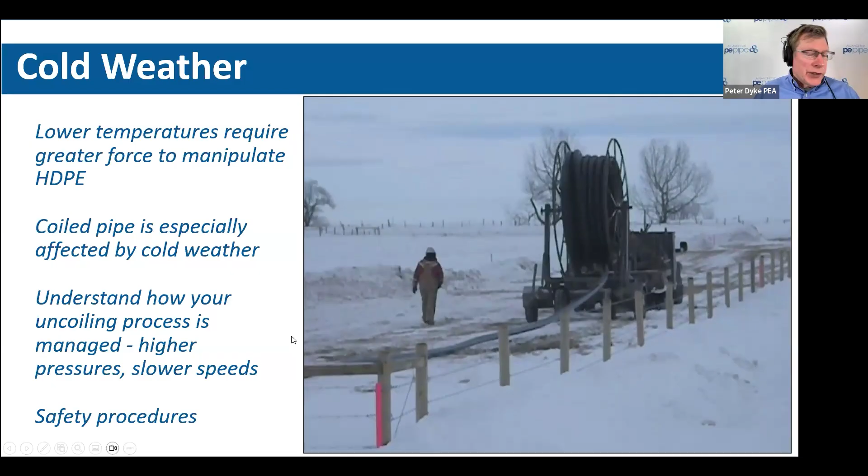This is Richard Colossa's video that shows in sub-zero temperatures, a 5-inch DR9 line being uncoiled off that reel, and it's being anchored by that white pickup truck. That is not uncommon. Then on this next video, let's just sit back and listen to Chris Wade.

Through the series of rollers — this series will straighten your pipe, this series out here will re-round your pipe. There's stored energy in this, correct? Yes, sir. So by the time we take that pipe as it's manufactured and start to put it into this roll, the process of the line tamer becomes straightening it out and removing some of that stored energy. That kinetic energy can really injure somebody if you're not careful.

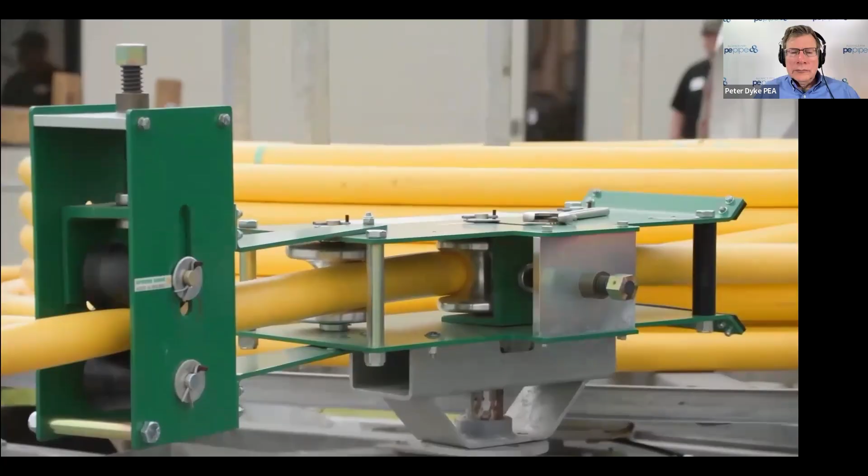Because when you coil pipe, it has a tendency to make it oval as opposed to being 100% round. I see that straightening out — look at that, absolutely. You can get a wide shot of that straight. Yeah, that piece of equipment takes the tension off the pipe, and you can see how it doesn't try to snap back — it just lays right down. That even works, guys, with cold pipe.

Now, that first image we showed, Tarik, that Richard Colossa video, they weren't using a line tamer, but you've used them with success. We have, yeah, on that project too. There is labor involved in pipe fusing, but in my experience, the benefits for the cost, the handling, and the ability to directional drill make it worth it.

For a lot of our sections, we'll build them in 800-foot lengths, put flanges on each side, and have those all staged in a road right-of-way or easement. Our operators start in the morning by excavating 800 feet of right-of-way or easement, and by afternoon they're pulling that 800-foot section over, dropping it in, and putting a valve on each side or connecting to a valve installed the day before. They're doing 800 feet per day on average.

That's the insulated and jacketed pipe. That's crazy — with Urecon pipe, we'll drag it 2 blocks or more from the staging area over to the project site. Just super efficient. I think project costs on our 4 to 6 inch are ranging from $45 to $65 a foot, and when we're able to pull the uninsulated pipe, we're getting projects averaging 1,000 feet per day.

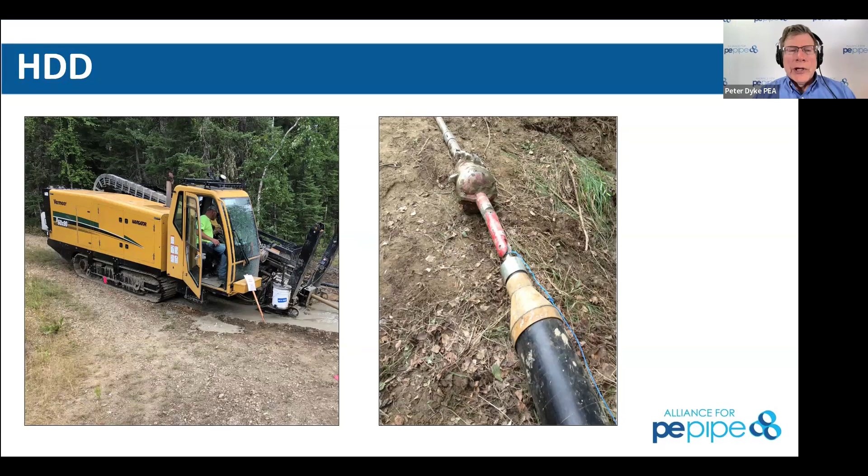Yeah, that's impressive. Carl just told me that they pre-insulate flexible pipe and put it on coils, so that's cool — it's not just the straight polyethylene pipe. And as you described, Tarik, you've even dragged that on the ground.

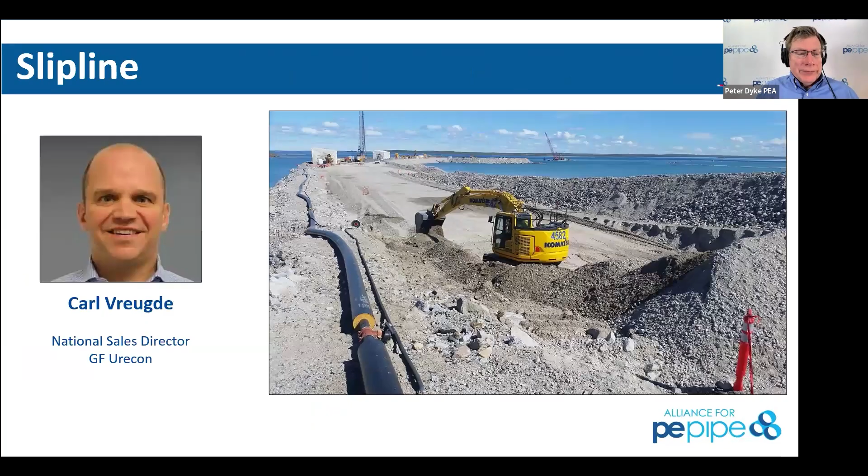Take it away, Tarik. So service line costs run about a third the cost for a customer to connect. A lot of our development areas and expansion areas have properties set 300 feet back from the edge of the road or right-of-way.

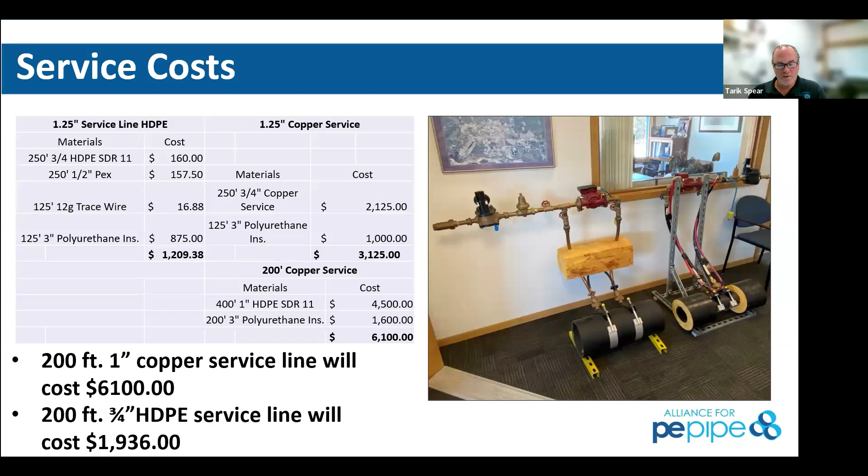So it gets water from our main to the property quickly and efficiently. The C factor I discussed, it's a battle of BTUs. If I can run a smaller pipe, longer distance, and provide the same GPM and service, I'm not paying as much to heat that water, and I'm not losing BTUs over the time it takes water to get from one point to another. Our loops just circulate, and the only warm water that comes into a loop is through consumption. So again, running longer distance with a smaller pipe means better circulation.

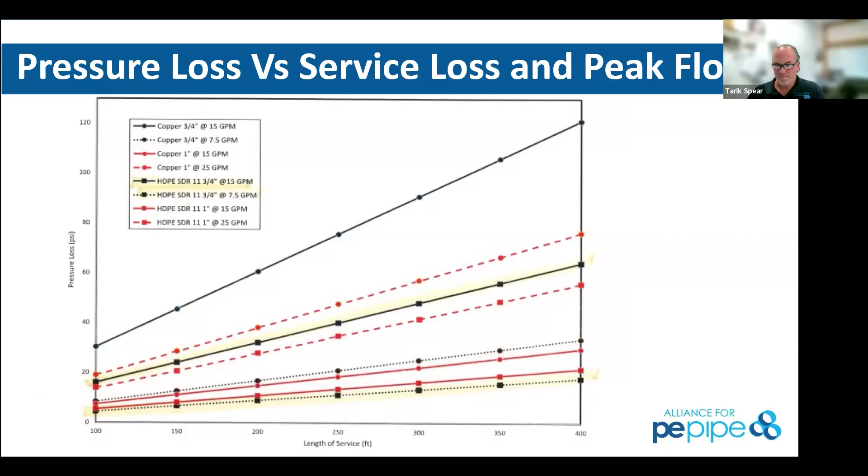In addition to efficiency and affordability, everyone thinks about price, and yes, that is a benefit. But for our operations, I've found over the years a reduction in O&M costs and heat expenses. We were paying $300,000 to $600,000 a year to heat water to keep these outer loops thawed. We've reduced that to about $200,000 a year now.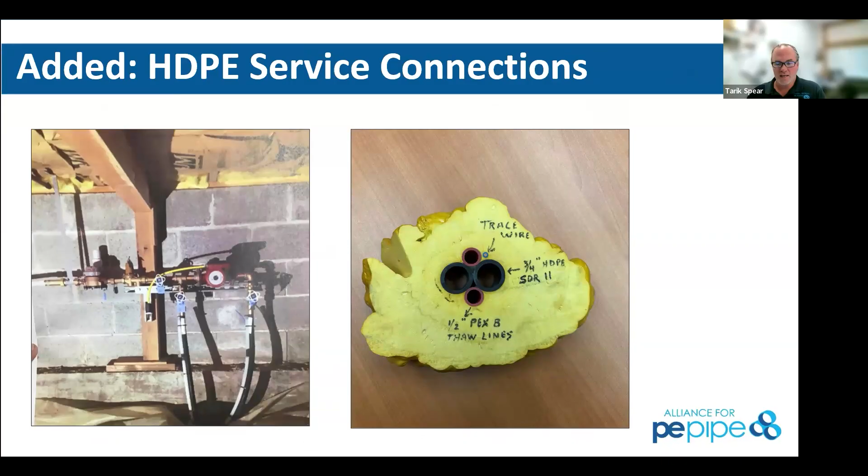Reduced energy costs - this is an example of a service connection. You have the 3/4 inch HDPE supply and return with a circ pump that circulates water to and from the main to the property, plus 2 heat trace thaw lines - a 1/2 inch PEX just in case it freezes, and a trace wire, all insulated in 3 inches of polyurethane.

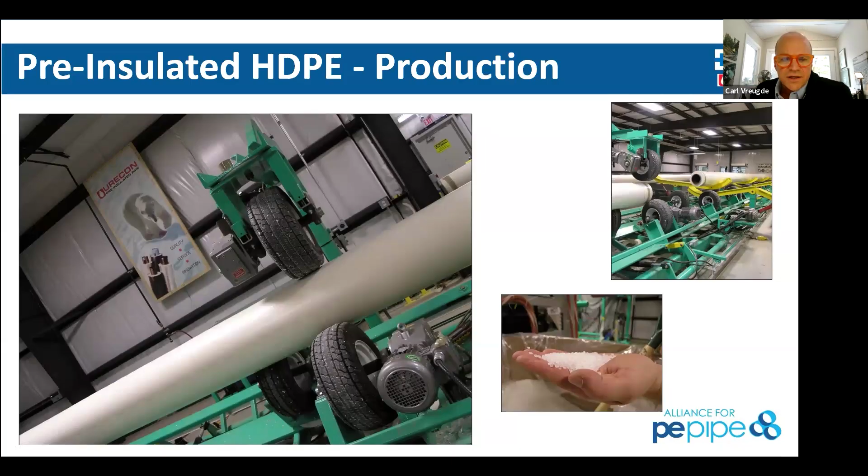Pre-insulated piping is our main solution for freeze prevention, and essentially it's 5 components: core pipe - HDPE core pipe, whatever DR fits the job - generally a nominal thickness of 2 inches of foam and a jacket, with those 3 components bonded together. The only other 2 additional components are heat tracing, if required, and insulation for fittings and joints. So that's a picture of a finished pre-insulated pipe ready to roll off the line on the way to a job site, arriving ready to install.

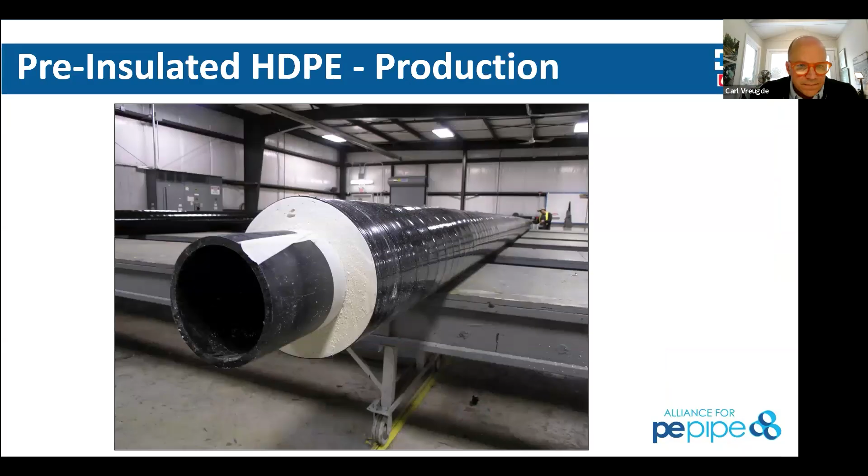Here's an illustration of what the insulation can do for you in terms of slowing down the time to freeze, based on a no-flow condition at those temperatures. For instance, an 8-inch pipe at a constant temperature of -30 - a bare pipe will take about 12 hours to freeze solid. With 2 inches of polyurethane foam, it takes almost 9 days to freeze 100% solid into an ice cube. So the heavy lifting is done by the polyurethane foam.

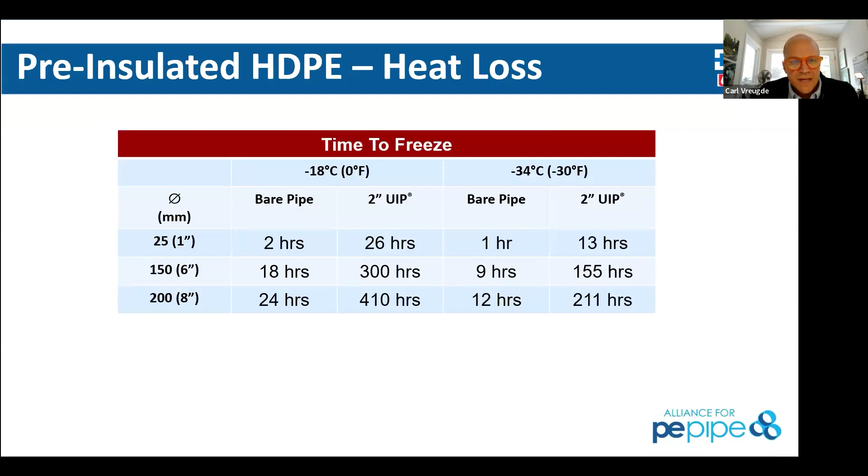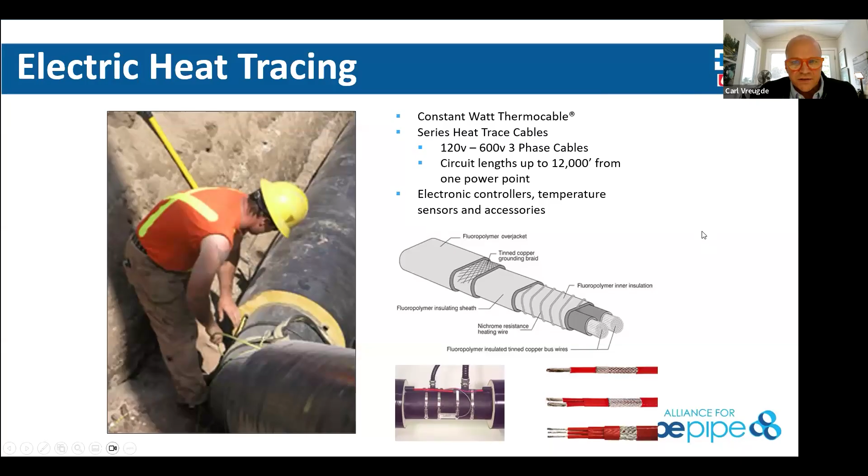But still, the water in the piping can and will freeze if there's no flow over a long period of time. So if required, we can add heat tracing to the mix and essentially provide a guarantee against freezing. The heat tracing works behind the urethane foam, and in the event of no flow, it pops on and keeps things nice and toasty. We can design heat tracing systems that run as far as 12,000 feet from one power point - pretty cool stuff.

Essentially, the heat tracing runs through a conduit on the core pipe itself, as you can see in that picture, and it's run from a controller. The controller monitors not the ambient temperature, but rather the temperature on the pipe wall itself. A big question we get all the time is, doesn't heat tracing bring danger of melting plastic? Sure, it's a possibility, but we guard against that by monitoring the temperature of the cable itself. We've got a high limit, a safety factor built in, so even if someone goofed up and put the wrong voltage on a system - supposed to be 110 and hooked up 240 - this high limit will shut things down before it's a problem.

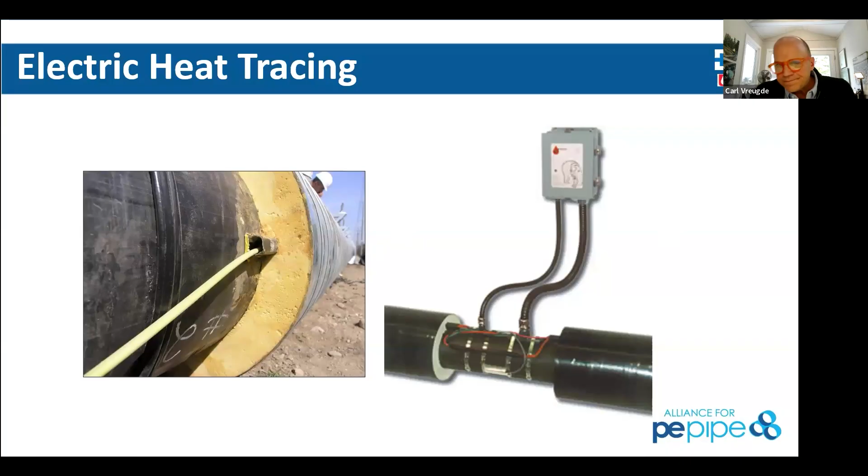So all good. The most common pre-insulated piping application is municipal water, as Tark was explaining earlier, shallow bury. The whole point of shallow bury pre-insulated pipe is that you're saving money on installation if the frost zone is especially rocky and difficult to get under. So it's a savings to be in the active frost zone with pre-insulated piping, with or without heat tracing.

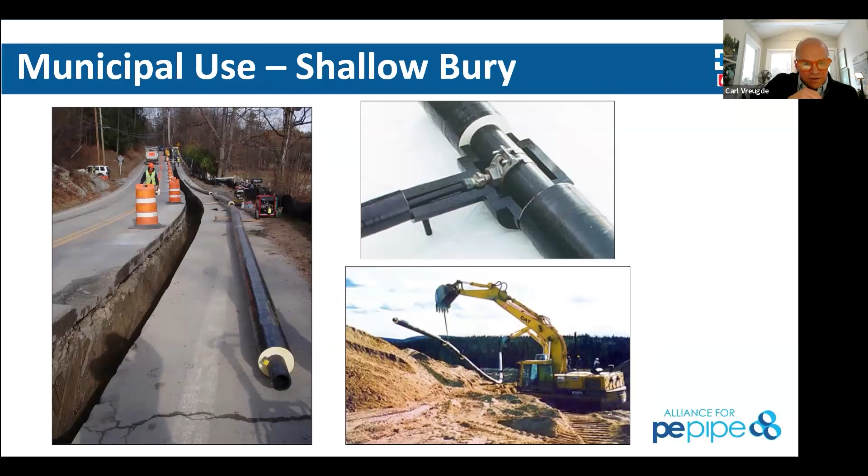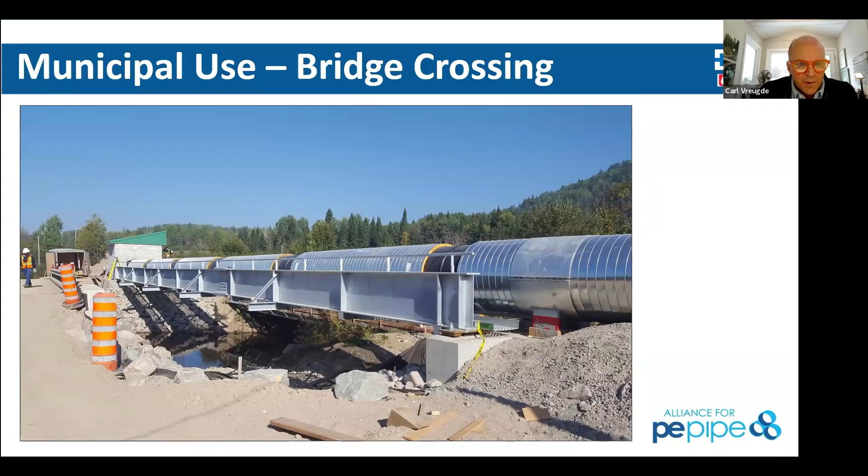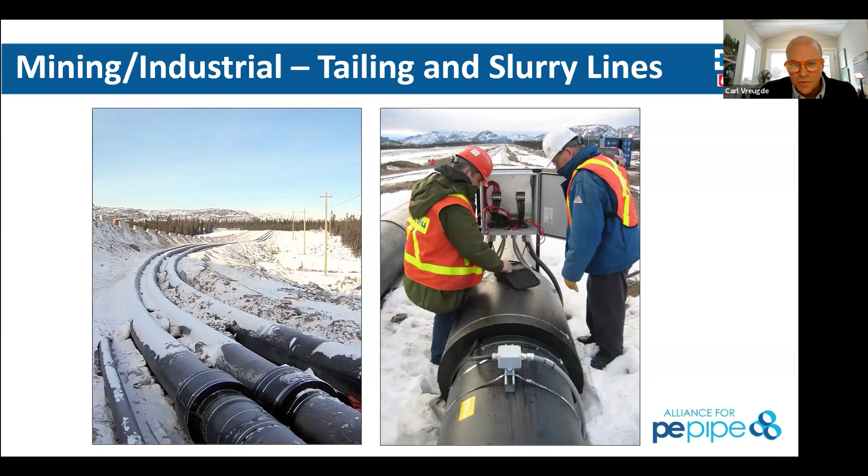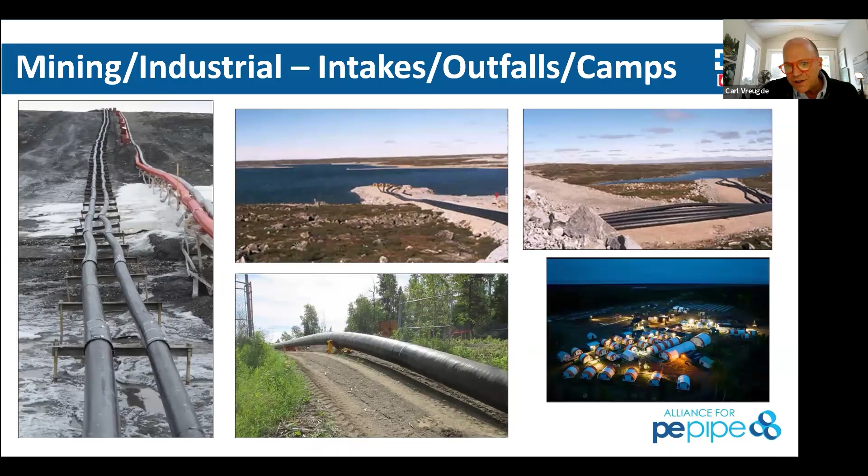Intakes are a big one, outfalls, camps, things like that. Again, pre-insulated HDPE piping is used to run either long distances or even short distances for camps. Prior to a mine being established, they'll set up a camp and run the water and waste through pre-insulated poly pipe.

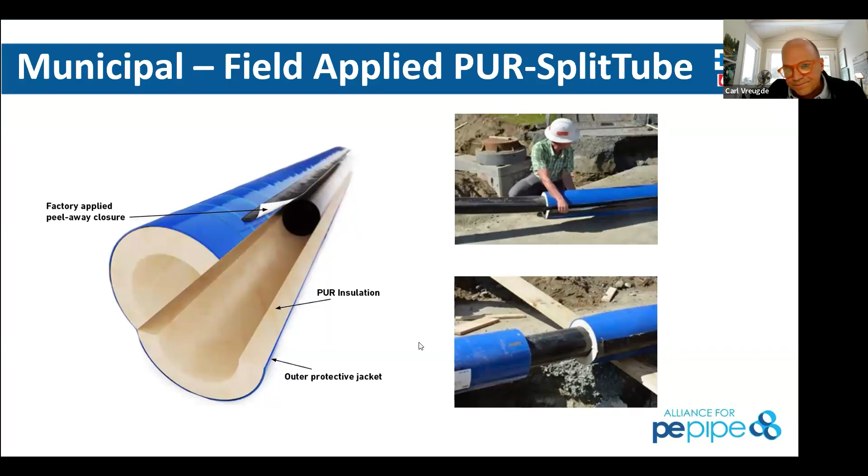Does shallow bury insulated pipe meet H-20 loading? The answer to that question is yes. Urethane foam has a very impressive property - it takes a lot of load. We can basically install it even in the active frost zone against H-20 loading at 1 or 2 foot bury.

Minimum bend radius - this is a big question that comes up all the time, especially in the mining sector. The answer is it's the same as standard poly, so we take the same rules. As an example, DR11 is 25 times the OD. We just adjust that math to take the OD of the jacketing to get the minimum bend radius of pre-insulated piping with polyethylene jacketing.

How do we decide whether we need heat tracing? We offer a calculator online for free that will basically give a number of hours before freezing. It's a heat loss calculation based on worst case scenario temperatures and no flow. Then, based on that data and intelligence, you can decide whether you need heat tracing or not, and we can help you along with that. Largest diameter, we go from 1 inch to 48 inch.

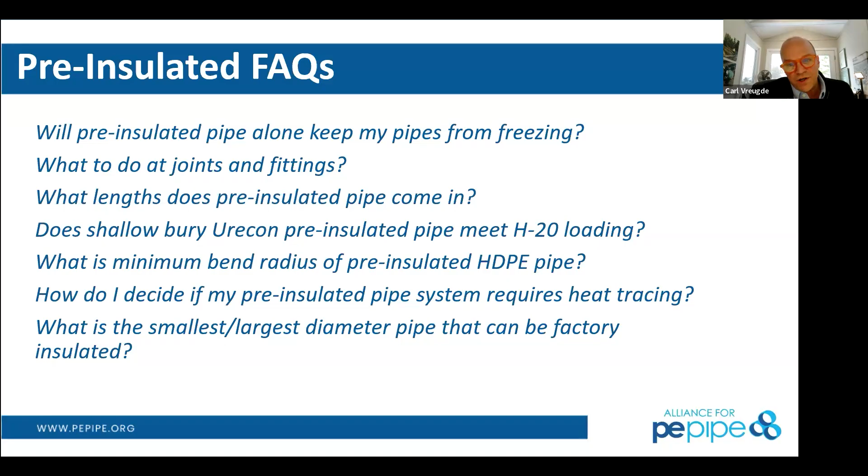Peter asked, just to verify, the tubing used for the heat tracer is just metal tubing, correct? Carl replied: not metal, it's plastic, usually PVC, but flexible along with the polyethylene pipe. Richard asked if there's no channel at all. Good question - sometimes it's just a space in the foam to allow passage of a cable, and the cable is installed after the pipe is put in the ground or above ground. The cable's insulated with a slippery Teflon jacket, which is why you don't necessarily need a conduit once the tracer wire is put in.